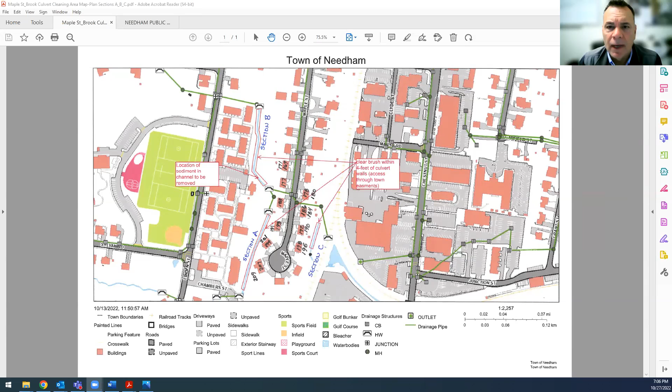Do we have any photos of this area? Yes, I submitted an email with all the photos of the areas, and all sections were listed there. So this is section A.

So this is section A, and you're going to be removing some of these vines coming into it, as well as some of the small saplings right on the edge. Correct, the stuff on the right-hand side, and on the left-hand side the small saplings. There are some invasives in there too, so we'll cut those. We're just cutting flush, not removing root systems or doing any of that at this point. We're just clearing it out to make sure these brooks and channels stay open for flow.

Any more photos? Oh yeah, we got plenty. You can see how this looks in this photo down below, it's just debris that's built up there. We're going to clean that out, make sure it's all gone. This big pile of stuff at the front, is that literally inside the channel? Correct. Okay, we'll get rid of that. Is this still section A? Correct.

Have we moved to section B? I think we have. It's so small I just can't see it. They look kind of similar, but there's still vegetation on the edges that will also come out, nothing larger than 3 inches? Probably 4 inches at the largest. And within 4 feet of the edge of the wall? Correct. So this is part of our general maintenance. Is this still section B? Yes, this is the area behind Maple Street that abuts the Needham Housing Authority property.

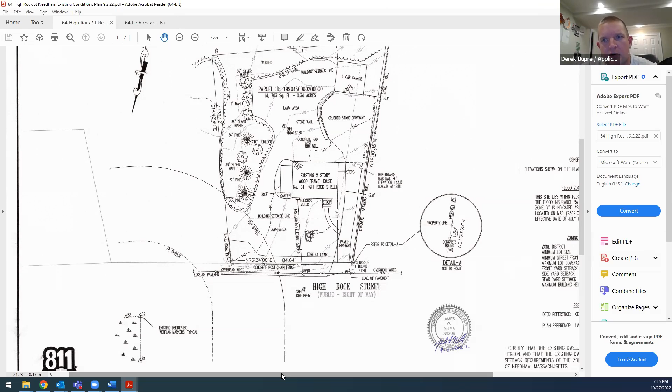Because, so you're actually going to do work there? You need to change that and grade it or something? Basically, the grades are staying the same on the property. The neighbor's a little bit lower, so we can't really be building up any, as it is. So we're just basically, it has a minor sloping grade from right to left on the property. So we're just gonna be, after the construction, reloaming it, seeding it, and basically what you see is what you get. This is the existing, right?

That's the existing conditions, correct? Okay, so here's proposed. It's basically the same, so in reality, if you didn't change that, are you just gonna reseed it or something? Because if you didn't change it at all, you didn't have to come to us. Yeah, we kind of went back and forth. There's gonna be some, obviously, on a construction site, minor regrading, loaming, things like that, but nothing substantial.

Okay, so have you put up erosion controls along this 100-foot buffer line? Yeah, we did them the other day. Because you could build the house and do all the grading and then come back to us next week. But if your erosion controls are along that line, at some point, when will you move them? To do the grading within it, at the very end, after the house is built. Yeah, then you gotta do the site, sometime. Okay.

Not anytime soon, that's for sure. We just got to get moving for the winter and stuff like that, and then figure out the grading come springtime.

It might be next spring when you regrade the lawn and reseed it, whatever. So be prepared to explain that, but any work outside of that 100-foot buffer line and outside of our jurisdiction, you are free to do, and then we'll talk about it in an official meeting in 2 weeks.

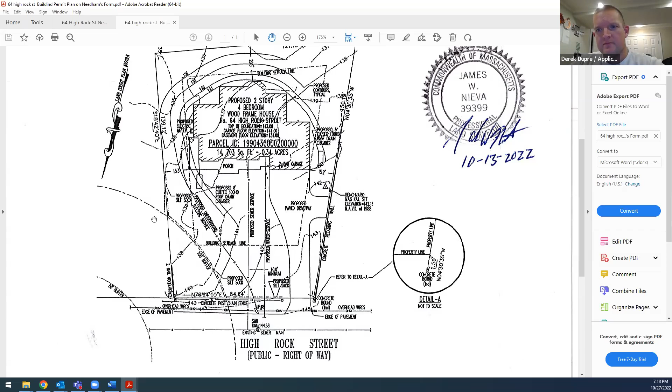Clay, you could take that down. I'm still kind of confused that we were supposed to open it, but anyway. Can I have a motion to continue the hearing for 64 High Rock Street for a request for determination of applicability.

To November 17th? Moved, thank you Sue. Can I have a second? A second, thank you Dave. All in favor? Allison, aye. Peter, aye. Dave, aye. Sue, aye. Great, thank you very much.

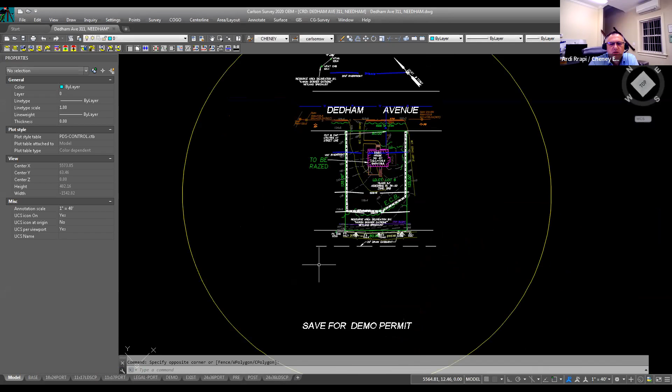Okay, unfortunately I have kind of forgotten what this one's about. So if I can share the screen with you guys, so everyone is on the same page. What's happening is that we have an existing house. Let me see if I can show you a better picture. So here is the existing house, that's what exists on the ground right now on Dedham Avenue, number 311. We have an existing driveway that wraps around the back of the house.

There is a slope on the property, so it was envisioned when they built this house for access on the back of the property. And what we are proposing is we're going to demolish this house with the porch and the water and sewer lines that it has, and we're proposing a new house. This will be razed, and the new house will be, we have shown the two of them overlaid with each other so you can see both of them.

So the green line would show the proposed house. What we have done in order to minimize the impact on the wetlands is that the entrance for the garage will be in the front of the house, so there will be no asphalt in the back of the property. However, the size of the building is, I would say, double the size of what you have for the existing house.

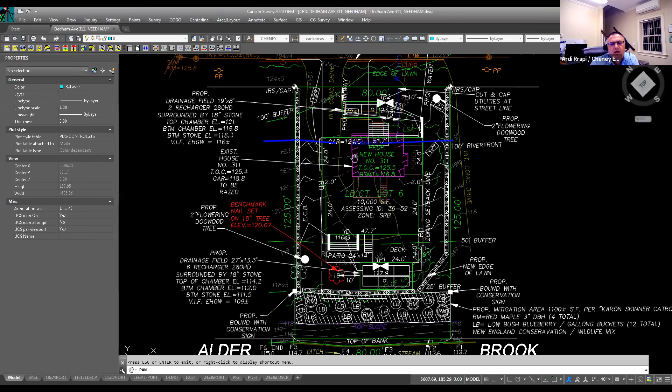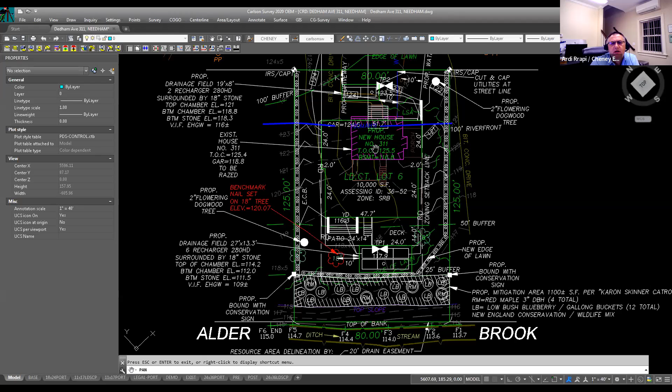What we have proposed in order to mitigate for the enlarged footprint of the building is to infiltrate, including the 100-year storm event, for the entire roof area of the house. The existing house doesn't have any infiltration that we could see. So what we are proposing is that this would be the new footprint of the house.

There is only one tree that we are proposing to remove, which is an 18-inch tree. It looks like the roots might be damaged. The owner has some pictures if the commission would like to see them.

So in any event, this would be the edge of the bank, and we've got the top of slope that exists on the ground, and part of the lawn comes inside the 25-foot buffer. As part of this project, we're proposing to use the 25-foot buffer as the limit of work, and mitigate by proposing several shrubs and 4 trees to be planted within this 25-foot buffer to enhance the protection to the river.

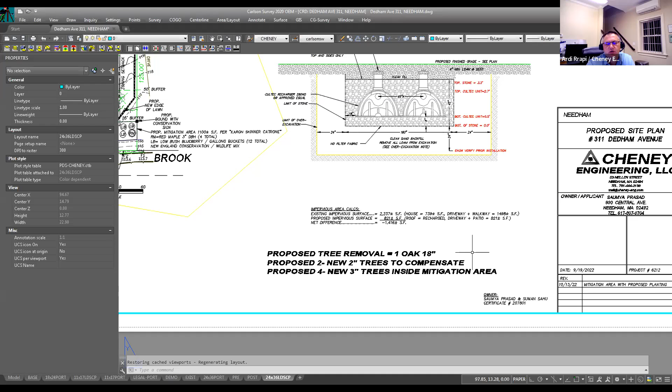For the impervious area calculations, we have shown here that we are recharging the roof for the entire house. So the impervious surface on the property would end up being almost negative 1,416 square feet.

It's only negative because we are recharging the entire roof, so we provided a drainage report showing that on every storm event we're going to be reducing runoff, including the 100-year storm event, into the ground. So 7 inches of water, you know what I mean.

So if you look at the comparison that we did before construction and after construction, on every storm event we have reduced the amount of runoff that goes off the site toward the brook. However, for clarity purposes, because we had a comment from DEP regarding compliance with the regulations, they requested that we provide the information for the impervious surface.

So the existing impervious surface within the 100-foot buffer is 1,520 square feet. Inside the 100-foot buffer, the impervious surface will be increased, just as impervious surface without taking any credit for the recharge area, by 1,000 square feet. So the proposed impervious surface would be 2,598 square feet.

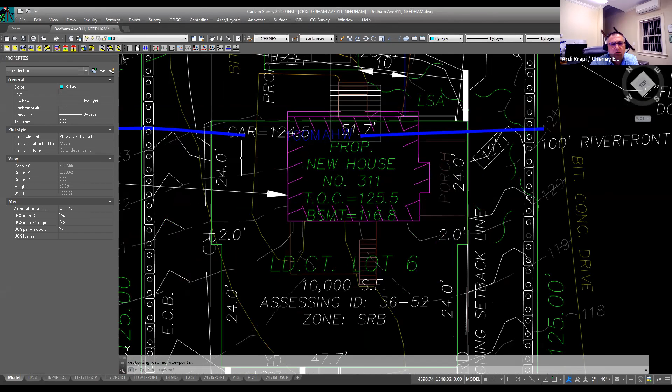We have shown here the setbacks for the building setback requirements. As you can see, we cannot move the building any closer toward the front because the requirement is that when you have a front-loading garage in Needham, you have to stay another 5 feet further away from the property line. So it ends up being a 25-foot setback. We have brought the house as close to the front setback as possible.

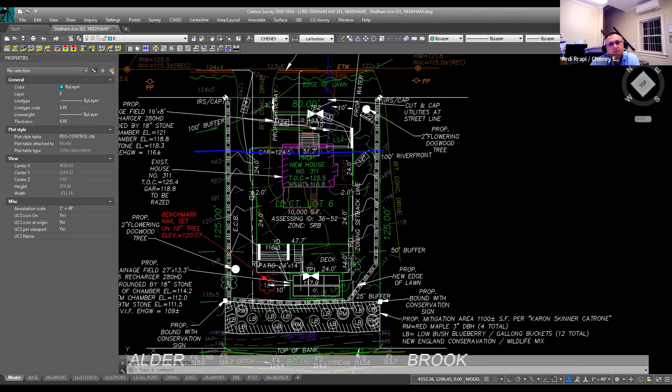And when all is said, doing this mitigation and to step beyond, since the conservation typically requires that we put monumentation to let future owners know that this is a no-touch zone, we propose two bounds with a sign on each on the 25-foot buffer. We're trying to be as proactive as possible, and we've already staked the property line on the ground. The owner has been trying to start this project sooner rather than later, so if there's anything we can do to facilitate the approval, we'd be happy to do it.

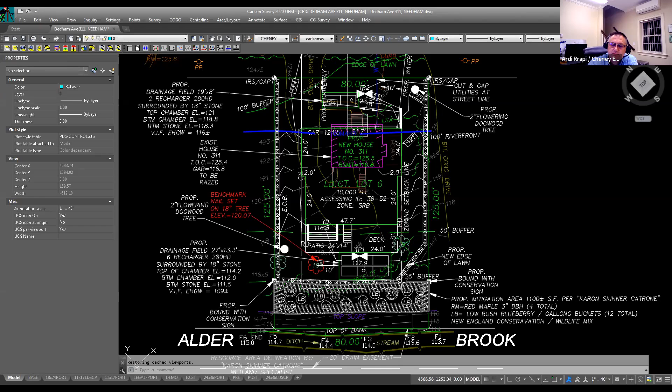Okay. You're finished with your presentation? That's correct, thank you. I'll go through the commission to see if anybody has any comments. Sue, you have anything?

The infiltration system, how far away is that from the 25-foot? One second. We would be another foot away, 26 feet away from the wetlands. Instead of 25, it's going to be 26.

We moved it a little bit to allow like a foot for the erosion control barrier to be in the 25-foot buffer, and after the erosion control barrier is where you'd put the septic system, the drainage field. We provided the commission with a report from George who checked the soils and didn't see any problems on the site. He didn't go too deep, but he felt that wouldn't be a problem, and there's a report attached to the notice of intent.

And a second question would be, was there lawn there originally within the 25-foot? That's correct, yeah, what we've shown is that the lawn went inside the 25-foot buffer. Part of this application would be that we'll take that off and restore the area, revegetating the 25-foot with native plants and a conservation mix. So the 25-foot will be enhanced.

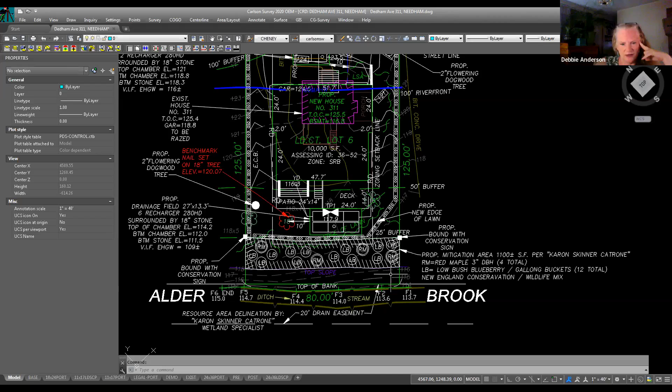As you can see, Karon went on the site and picked up 4 locations for the new plantings. As far as the low bush blueberries, we're planning on putting them around the existing trees. All right, because there's a pretty good canopy back there right now. We thought it wouldn't hurt adding more, but. No, thank you, I just needed that clarification. Sorry to interrupt.

Sue, anything more from you? Yeah, I'm good, I'm good. Thank you. Allison? Yeah, I have three.

To follow up on Sue's question, I think it would be really helpful if we had the existing trees located between the 25 and the wetland, to see if the way you've located the new plantings will really work. That's one thing. The second thing is, I was trying to figure out what you did, if anything, with the 17-foot and 18-foot contour in the back of the yard from the house back. I can see you've modified it to make little swales go down the hill, right off the house.

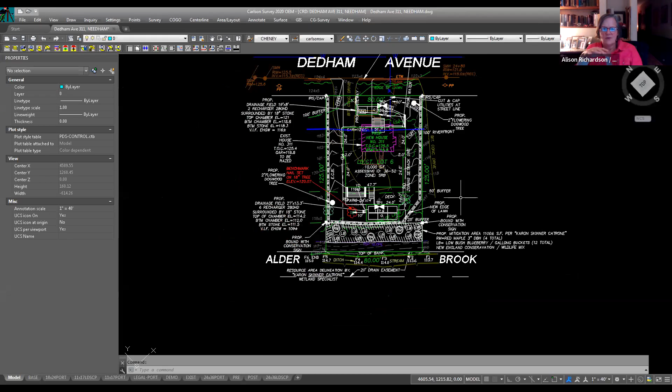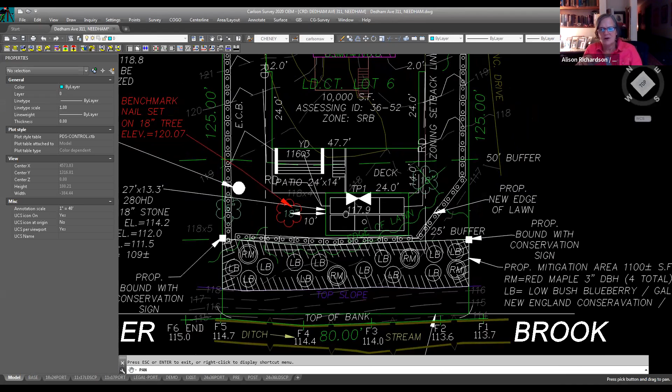But once you're past the house, you just have the existing contours. I'm wondering, are you really going to install the patio? You don't show any new contours from the house down, you just show the existing 18 and the existing 17. Are you really going to have the patio, what are the elevations of that? Are you filling? And the infiltration basin that's right on the edge of the 25, is that really going to be on a slope? I think if you plan on doing any grading from that 25 to the house, I want to see what it is.

Yeah, so maybe that didn't make enough justice, let me show you. But you don't show any new grades on that plan that you just had up from the house down. So if you can hear me, in this scenario, I'm showing the existing condition. I don't know what's going on.

I don't know, can you hear me now?

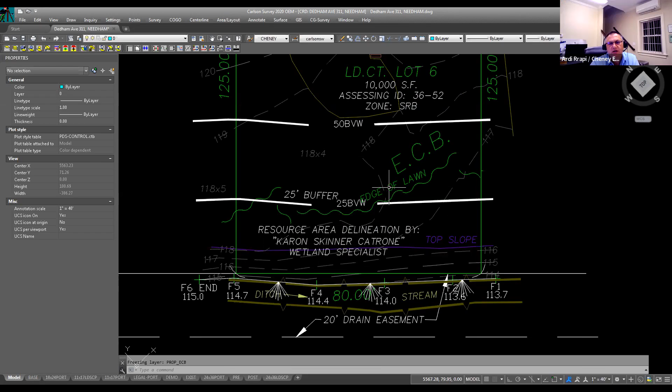Yeah, that's better. So what's happening is I'm showing you the existing conditions as a starting point. We have elevation 118 all around here, and then it goes to elevation 117, then 118, 117. Those aren't being shown as slope changed at all in the plan.

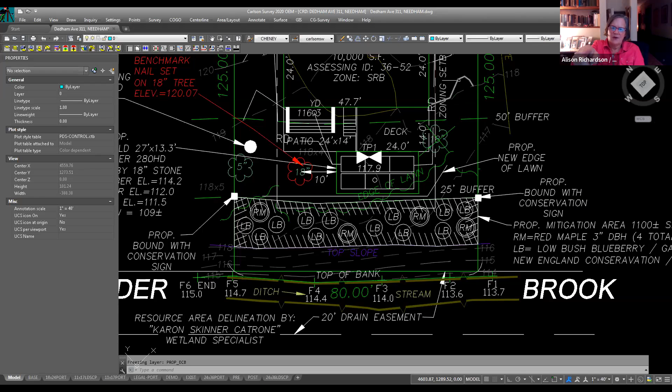What we are proposing is we are not changing the grade over there. So on the outside, we're going to be at elevation 118. But you see the existing 118 there - you're changing it into the bottom? Yes, if you look at 118, I see that, but then what happens to the corner of the building?

Yes, but then what happens to the 118 that's existing? Are you filling in there, or cutting? We're keeping the 118 and a half. The 118 will go to the back of the building. We're not filling anything, we leave this area as it is right now.

You see the 118, you see the deck where it says deck? Right to the left of that. Are you doing anything with what you just highlighted in the back of the yard? No, we're trying to leave the soil as is. All right, you're not regrading for the patio? The patio is land wherever it is, and you're keeping it at 118.

That's correct. So the patio in here, if you look, this is 118 at the corner of the wall. I know what I'm looking at. So we are not planning to change the grade on the backyard.

That's correct. All right, so the other question I had was... oh, I've forgotten. Oh yes, you might have already talked about this - is the patio permeable pavers, or gravel? What is it?

Because half of the patio is already going to be with steps coming out of the house, almost more than half of the patio is going to be with steps coming out of the house. They are not going to be pervious, so we have considered the patio as impervious. If the commission would prefer that the outside here be pervious, we can certainly accommodate that. That's not a problem, but on our calculations we have figured it out as being impervious.

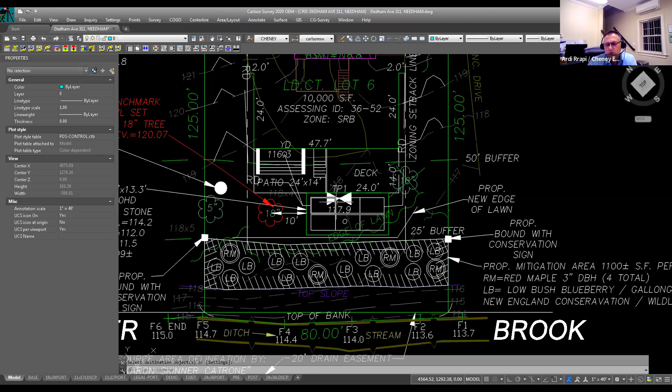It's up to you. Okay, we can think about that. Allison, any further comments from you?

No, but I think you could condition it so that the mitigation planting locations would be dependent on the existing tree canopy, so they're located to have the maximum root system and light, and the least impact on the existing tree root system. If you're going to approve it tonight, you need language that allows you to move those around so they'll live, and so you're not going to kill the trees by digging everywhere.

Dave, any questions or comments? No, looks good. Thank you.

Peter? Yeah, I had the same question as Deb did, and I guess it remains to be seen. I do like the idea of helping the understory, since that's been lawn for a long time. So the blueberry bushes would work, but I agree that it's very leafy, that backyard.

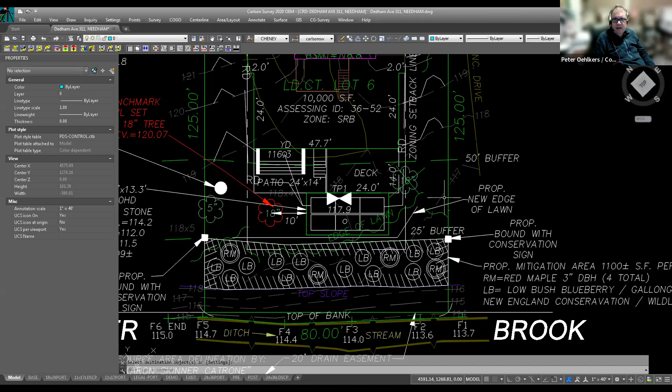So I did send Clay some pictures if you want to look at pictures. Oh yeah, that would be great. That's the back of the house.

So that is looking... oh, is this along the 25 foot buffer? Yeah, 25. Okay, the area to the left there - there should be more, maybe head on. That's the stream channel.

Oh wait, go back to the stream channel for a second. Thank you, okay, all right, great. And the next one, so that one's looking head on at that area in front of the stream channel.

So there are existing trees, yeah, definitely existing trees in there. And what's the, oh, the fence is the side property line? Yeah, the side property, yep. So the trees are going in the already treed area, they're not going in the lawn there, right? That's correct.

The house - which is the tree that's coming down, do we know? That's up by the house more? It's on the left-hand side of this tree in here, this tree that we are keeping - this tree on the left-hand side. You will see, if you go to the picture before that, it was showing the fence.

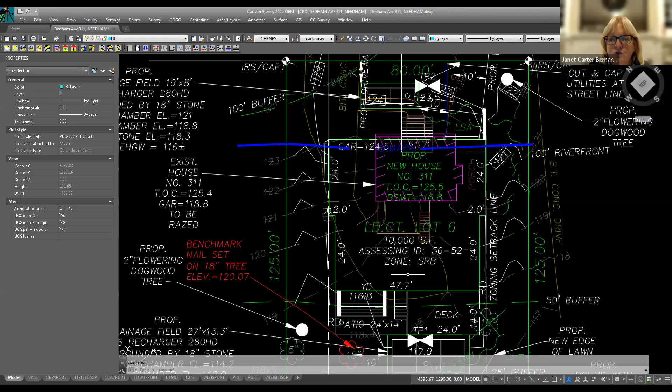There's some flags, F3 shows it at 114. So how high do you think the wall is? Around 4 feet there. So that would bring your stream to 110. Yes, so you're estimating the groundwater is at 109, which is lower than the bottom of the stream. So that could be a problem.

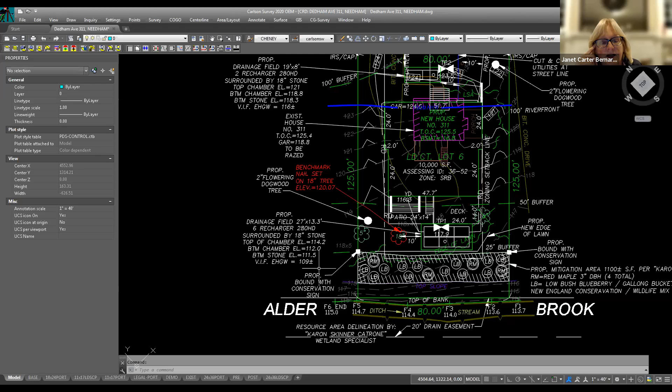We're going to need you to provide a certified soil evaluator or professional engineer to certify that test pit before the chamber goes in, and make sure you have plenty of separation to groundwater. Of course, that was our intent, and we have room on the front of the building if we need to adjust the design. You see how we have 2 chambers over there and we put the bulk on the back? If needed, we can change the size of the Cultec chambers that we're going to use.

So we don't believe that would be an issue, but nevertheless we put a verify-in-field note to make sure we do get that elevation. Typically what we've done before is when they have the machines on site, we'll have them verify, and we'll give you a written statement from George saying he witnessed it and the groundwater is below elevation 109.

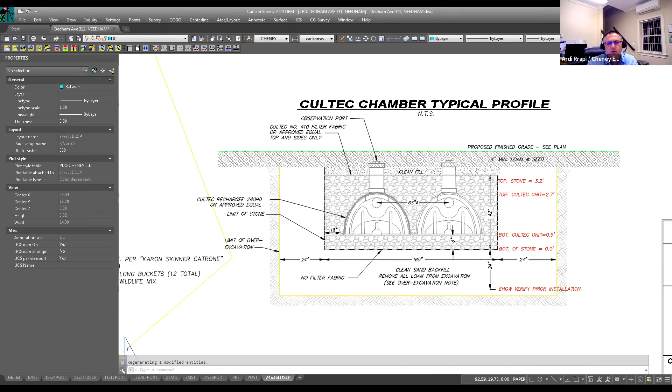The detail you have for your Cultec chamber, the typical profile detail, is wrong. It's the wrong detail. Okay, sorry about that. Your calculations were correct, but you're showing the large chambers with the 42-inch depth, when you actually used the 280. We used that detail, but I called out the 280. Right, so you need to change the detail on the plan. Okay, I'll make sure to match it.

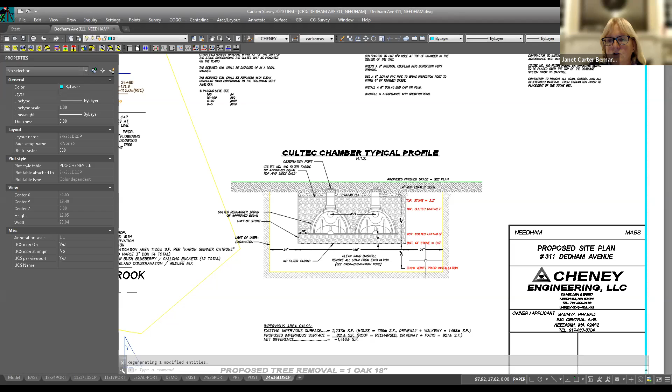So I did look at your stormwater calculations, and besides the fact that you didn't actually have... I've kind of lost you guys, I don't know what I just did. Okay, there you are.

You didn't really know where groundwater is. So you'll have to remove all of the soil so that clay is gone from below those chambers. You have to confirm that it's good soil underneath them and that you have some separation to groundwater. What George reported was that as soon as you take off the A layer, the B layer, below the B layer, that's when the first 3 feet were bad.

So what's going to happen is we're going to take the top part out, and the installation will be below the clay layers. Exactly, you're not going to stick the clay back in. And on the detail, you can see we allowed even more room, another 2 feet on each side of the field, to be opened up and make sure we got good soils.

So we're going to need a planting plan that shows the existing trees. And we're going to need the detail corrected on the Cultec chamber. We want to show the porous patio and a detail for the permeable patio. And a test pit done, certified by a soil evaluator or a professional engineer saying that you have adequate separation. I guess I'd like the commission's opinion about having him provide this information.

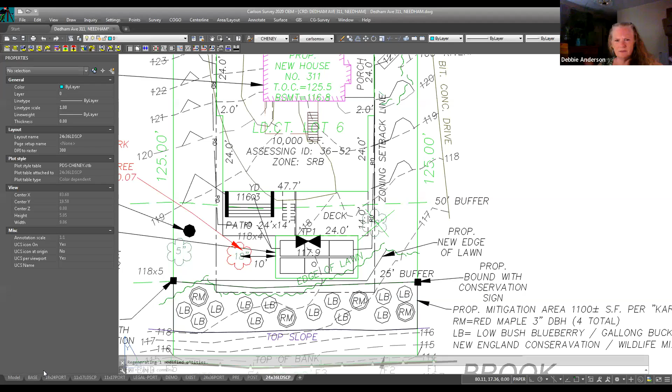Still want that third bound? Well, they're just on the property lines, so there's nothing in the middle, basically a straight run. Whatever, up to you guys. So we've got one bound along, another bound along the property line, and we're trying to keep people from going in there and mowing and such. So that's just why I think you should have another one that's visible instead of just on the property lines.

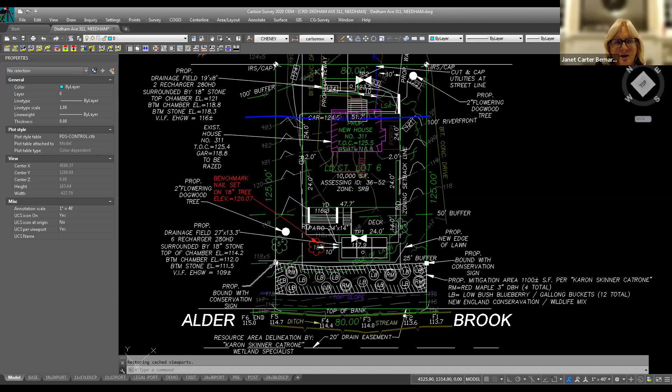So it's within that area that they're mitigating, and it can be a stake, be like a monument. It can be a rock, it can be a birdhouse, it can be. Just because the lawn has already gone into the 25-foot once, so we just want to make clear where it is.

So can we show like a boulder over there? Would that work so that we can make it kind of fit with everything else, or are you looking for an actual bound? A boulder, anybody object to a boulder? I have no problem with a boulder, as long as it has a sign on it, it's fine. We have some markers that you can affix to it, it's a little circle, you can affix it to the boulder and to the property lines. Okay, anything else on that, or are we ready to vote?

They did request a waiver for work within the 25 foot, and a waiver of the waiver fee. So as far as, I forgot to come back to the riverfront area.

This is the riverfront area DEP was concerned about. The whole project was called a redevelopment, but only the existing impervious area is redevelopment. As far as work within the riverfront, that's allowable because the existing driveway already extended as far as the proposed house will go. The added impervious amount isn't over the threshold, so they're meeting the riverfront area performance standards. I needed them to add mitigations to improve the existing conditions, which is why that area is now being mitigated to improve the riverfront area.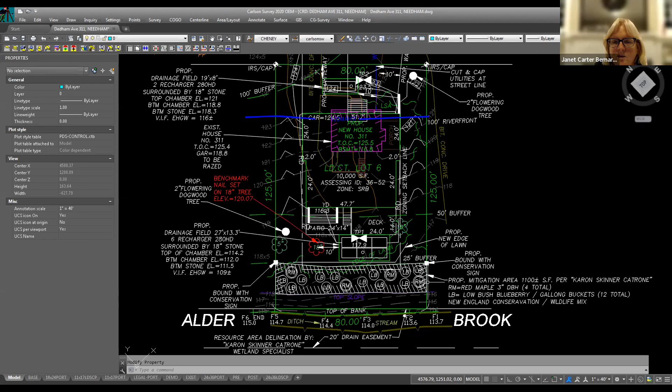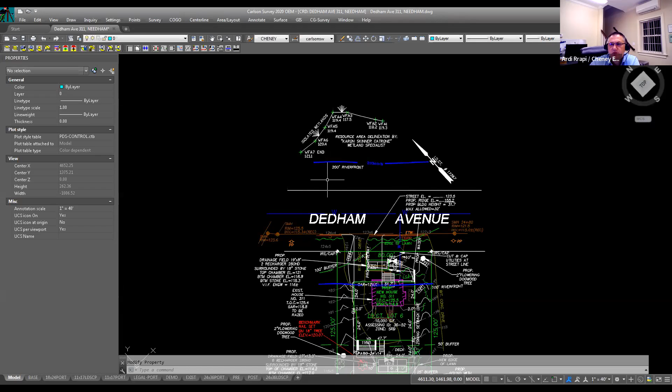I forgot to mention there are wetlands across the street, across Dedham Avenue. This would be the 100-foot buffer from that isolated wetland. It doesn't impact what we're doing, but for clarity it's shown on the plans since the road is on the other side of the project.

There's no catch basin in the street right next to the driveway, is there? No, we located the sewer manholes here, but there's no catch basin or anything that could affect the ground.

If we're ready to close this, we still need to address the waiver. We don't have to do that until we review it, just keeping that in mind—we'll have to come back to the waiver request. It's hard with this type of project.

So if we're ready to close the hearing, I'll take a motion. I move we close the hearing on 311 Dedham Ave, file number 234892. Can I have a second? Second, thank you Dave. All in favor: Peter, aye. Allison, aye. Dave, aye. Sue, aye. Janet, aye.

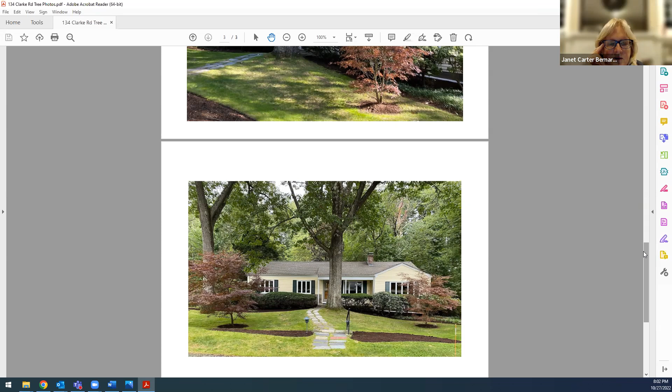It is kind of always heartbreaking for us to see beautiful trees being asked to be removed. I can appreciate the one that's in front of the front door, as it seems very close to the house. The one to the side, I really don't see any reason to remove a perfectly healthy tree that's on the side of a house that's providing shade and canopy and so many wonderful opportunities for this home. They're going to be very hot if they remove those trees.

But the trees in the back, I understand, are within the 25-foot no disturb of the stream. Is that true? They're on the bank of the stream. So we cannot allow you to remove the trees that are in the back, because that's in our no disturb zone.

So you hear that. Do you have any thoughts, Allison? Yeah, I do. I mean, without going and looking at them, I know a lot about red oaks, and I don't know if your arborist did a density test, where they can test to see if it's sound inside. Those are old trees.

Now red oaks live a long time, but they do start to decline with great age, and they must be at least 80 years old, maybe older, 100, I don't know. Certainly the one right in the middle of the house looks really close, looks gigantic. And the other one looks like there's a big limb coming over the house, the one on the side.

And the problem I see with pruning giant limbs off older trees is that, yeah, you do reduce the canopy and you can make it temporarily more safe. But when you cut a great big limb like that, no matter how well you do it, it's going to take a long time for it to heal, for it to callus over. It's a source, it's just like a human cutting your arm off. It's a source of potential infection. And so you are kind of setting the tree back.

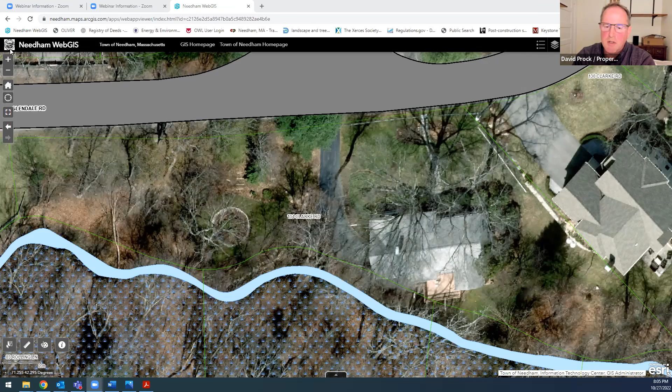One of the things we're really looking for is, can we or can't we take them down? And that's sort of been the question. It kind of leads to going back and forth a little bit with our lawyers and the buyer's lawyers. We're just trying to figure out, we'd like to move on and the new buyers would like to move in, and we're just looking for clear marching orders. It sounds like we can't remove the trees that are down by the stream.

I understand that. But in talking with Deb, we're just trying to understand what we can and can't do, I guess. So if you were to remove the 2 trees in the front, each tree, we would require 4 replacement trees because they are large, healthy trees. If they were hazard trees or other things, we maybe don't ask for as much mitigation as a very healthy tree.

I don't think we can say you can't take them down. We just feel badly about asking you to take them down because it's a struggle for us. Within the 25-foot no-disturb zone, you can't take them down, but the 2 front trees we could.

When it comes to the requirement of 4 trees per tree, we are in the process of changing hands with the property. What is the liability if we remove the trees and then, let's say, the new owners don't replace them? Is there liability on our side?

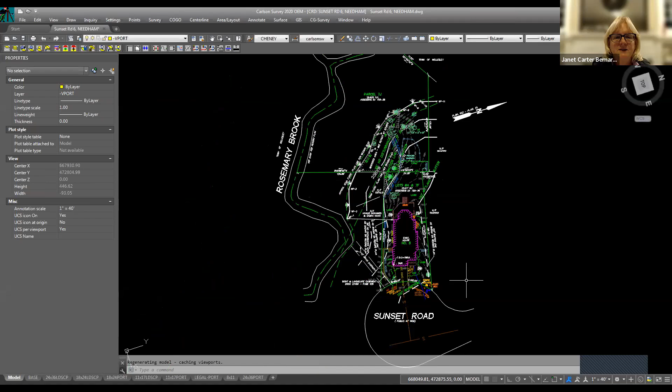So what's happening is that this is an old project, and the way the order of conditions was issued was that Conservation Commission would not consider issuing a certificate of compliance until we provided a plan showing the actual document that needed to be recorded at the Registry of Deeds for the restriction area. So it's an old project from, I guess, 10 or 12 years ago, or older.

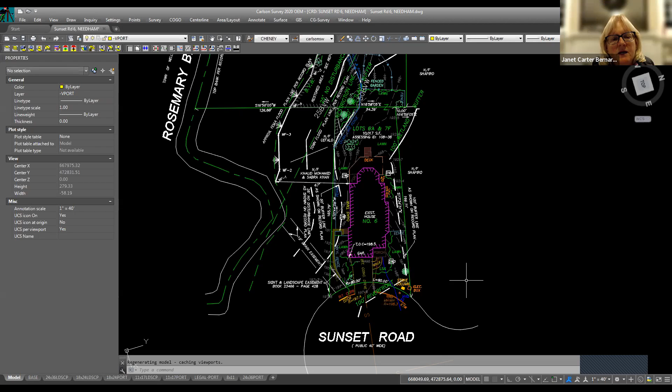I don't mean to interrupt, but Sunset Road, that's where the Sunita Williams School is, right at the end of this? Yeah, it's a little bit further down. This is the cul-de-sac, next to it, at the end of the cul-de-sac. You keep going. Okay, got it. Now I know where we are.

All right, so what happened with the plans? Let me start with the plan first. I have an overlay. This is the original plan showing what was proposed at the time. 2009 is when the work was done, and now we are in 2022.

The owner of the property sold the house. The new people have moved in, but we've got to close the order of conditions. Let me freeze this. So the new house has been built with a deck, the driveway in the front of the house, and the fence that was required to be installed. There has been going back and forth between me and Clayton and Deb as far as what transpired.

I have a letter that we provided for a request for a certificate of compliance. So the items that we see are different between what was proposed and what actually got done. Item number 1 would be a gas tank — it's a propane tank that sticks above the ground, located on the left-hand side. This is one of the items that wasn't approved, but is already installed.

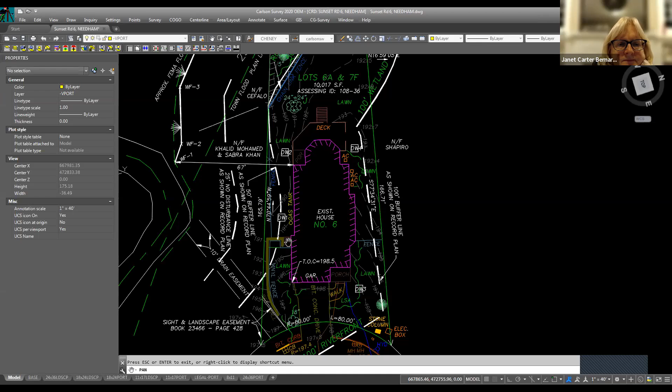When we were on the ground, we located the trees so we know which ones are on the ground and which one is missing. What we found is a couple of typos. This tree, for example, tree B, we measured at 15 inches, but on the original plans in 2009 it was shown as 18 inches. The only reasonable explanation we could come up with is that the party chief was a short guy, and the chest height must have been much lower than what we measured. So we don't believe the tree shrunk, but it is what it is.

The same thing for this one, we measured it at 7 inches. On the list that they had done, they were showing a 10-inch cluster, but showing it as one tree. For clarity, we're saying it's just a 7-inch pine, but it is what it is.

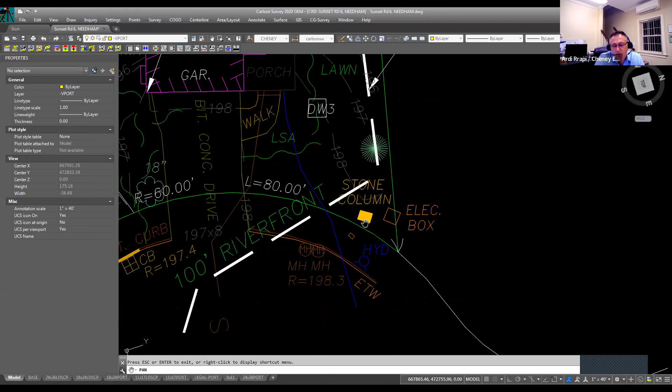There is a stone column on the front here, near the electric box - you see there's like a stone column. I don't know why they put it there. It's almost 6, maybe 4 or 5 feet tall, but it's there. It's within the 100-foot buffer.

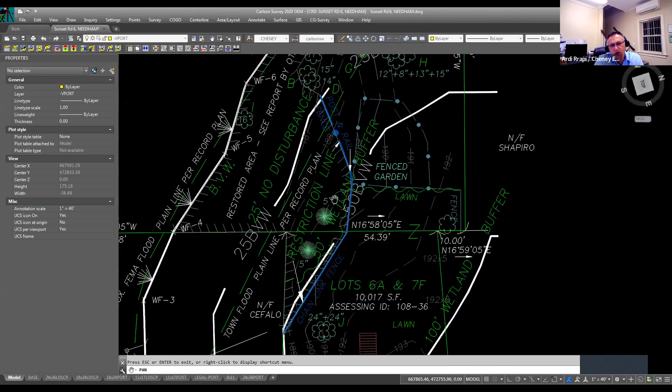One of the things required by the commission was that for the restriction line, a fence was going to be installed along this line here. So at the time, this section of post and rail - just vertical posts with ropes in between - wasn't there before, but they put it in. We didn't go all the way to the tree because we didn't want to damage it. But here is the location where we staked it on the ground where the 25-foot buffer was, and they moved the chain link fence so that everything falls into place.

What we did is hatch the area to show the line of where the replication was going to happen - I'll make it red so you guys can see it. So this would be the area of the replication in question. The fence is there, and the post and rail fence over there continues also.

Why would the area have this sharp 90-degree bend in it?

This is how much they own. This is owned by someone else. Oh okay, that's why, that's a different property. It's a different property owner.

You see how they were showing it on the approved plans? Yeah, okay.

Let me show you another plan. This is the plan that we provided to Conservation Commission, because part of the deal is that the Conservation Commission has to approve the restriction plan. We already provided that document to the commission for your approval.

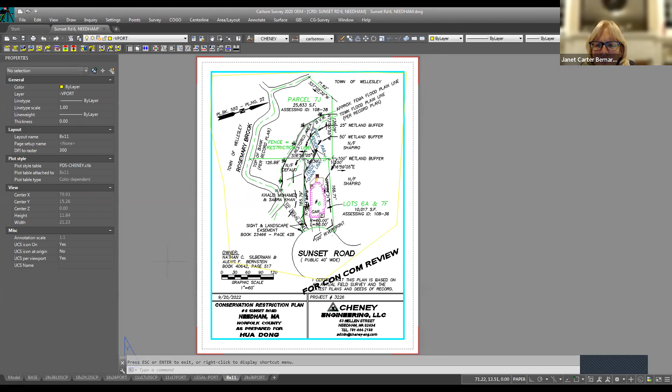So there is a restriction that was required to be put on the property. That hatched area that you just showed us, that little hatched area is supposed to have a conservation restriction on it?

Me and Clay agreed that it looks like that's what the intent was of the commission at the time, because this area was disturbed. So what they said was, you got to put a fence in here and you got to provide the plan to be recorded at the Registry of Deeds.

We are assuming that the intent at the time the commission had was that this area that they were replicating or restoring was to be restricted. It would have made sense that you restrict the whole area up to the 25-foot buffer, but it wasn't that clear. That's the purpose of this plan, so that if you guys feel we got to change something, maybe now is the time.

It just seems like when you have a conservation restriction, don't you kind of say north 35 degrees, and then take the left and so on. All this zigzaggy thing is kind of a mess.

My understanding was that the way the commission was envisioning this was to say that the chain link fence area with the post and rail area, this would be the limit of the restriction. So anything beyond, on the left-hand side of the chain link fence and the post and rail fence, is the restriction area. I showed the hatched area just for clarity.

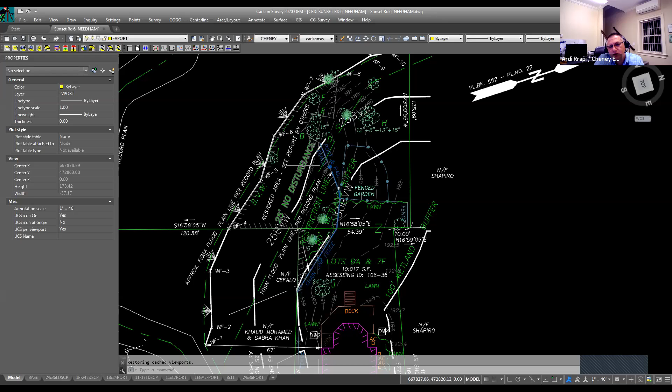If it was me, for clarity purposes, I would take off the restoration area and just show the fences in there so people would know in the future, 20 years from now, that the restriction goes from the fence all the way up to the wetlands. We showed it, and I can take it off, but this is the restored area - I showed it so you guys can see where the restored area is.

But one version would be if you remove that and you just make it clear, and you say here is the post and rail fence, and fence equals restriction area. Then someone would know that this area here is what's being restricted.

Rosemary Brook? Is that Rosemary Brook there? That's correct. So that piece is also restricted compared to just this little hatched area?

It just seems crazy, this little teeny hatched area. Well, the hatched area is the restored area, not the restricted area. Okay, so the hatched is the restored area, not the restricted area.

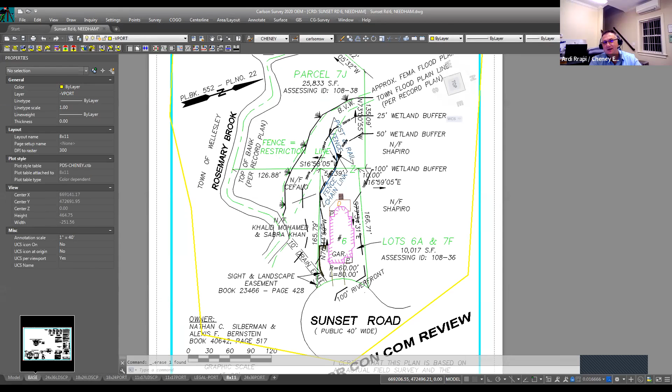So what about to the right of that fence? The order wasn't clear at the time, so if you would like to show that line, we'll be happy to do it. But if you look in here, this is where the fence ended because this is where the trees were. I'll show you the approved plan.

So here is the approved plan, guys. You see the yellow line, that would be the line where they wanted the conservation in 2009, wanted that fence to be put in.

So what was it correlated to, because of the floodplain? Was it to somehow correlate with the floodplain? No, it correlates with the limit of the bordering vegetated wetland.

So the planting area, you can see where the edge of the wetland is. So where the fence is, the restored area was to go to the wetland, correct, wetland flag 7.

Okay, so if we were to, in our heads, extend the yellow fence to wetland flag 7, and say that - well, I guess it's more wetland flag 8.

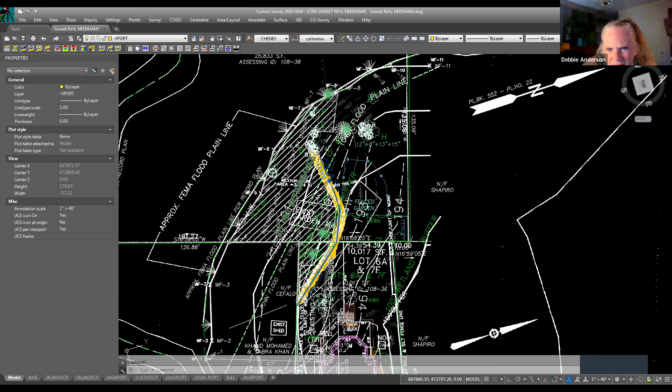The hatched area, yeah. So then it would go to a different angle. So is that what we wanted to do, like rotate it up to wetland flag 8?

I kind of wonder why the whole 25 foot should be included, but I'm trying to understand what was thought of so long ago.

So if you look in here, this would be the line that they were showing for the town floodplain line, the green line with the big dashes. So my guess would be that you cannot do anything within that area anyway.

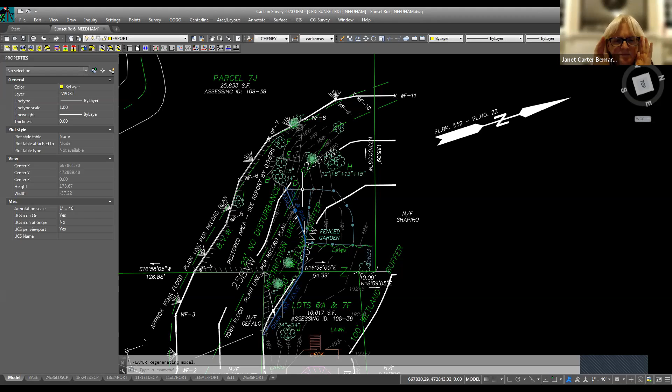Right, so maybe what you might want to say in the language on the documents - another way to look at this would be to say, okay, the area on the southerly side of the fence, and the area inside the 25-foot buffer up to the brook, will be all conservation area or restricted area.

Well, that would work for me to say the 25-foot buffer. But is there anything marking that 25-foot buffer besides the fence that ends in the middle of it? Nothing.

It was required that the fence be put in. It wasn't required anything more. So you're not gonna include the whole restoration area?

Well, but I don't know how to show that to anybody. How about if we do this - rather than have a monument over there, we put a distance in here saying 73 feet away.

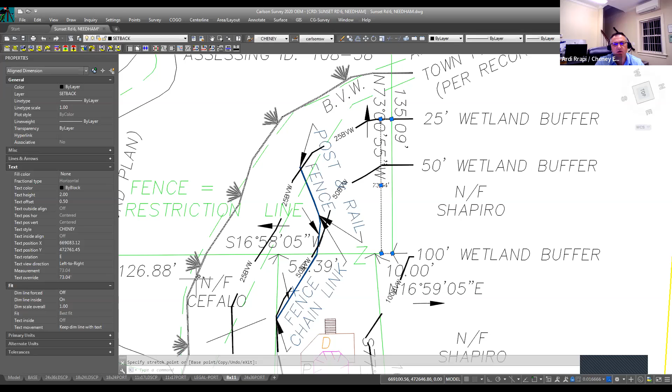Do you see what I'm saying? So from the corner, from the lot corner. Can you zoom out a little? Or maybe I've zoomed in a lot. I don't know - oh, I've zoomed in. Wait, hold on, sorry.

You see, so from the 25-foot buffer, there's - let me make this in red. So from the property corner to where the 25-foot buffer is, it's 73 feet away.

Okay, so I can show a distance on the plan, say 73 feet to there. Now you can say that the restricted area, which is shown on the plan, shown Cheney Engineering, goes along the existing fence, chain link fence, and the post and rail fence up to the 73-foot mark from the front of the lot. You know what I mean?

That way we don't have to go back and put something else on the ground when we got new people owning the property. Yep.

Now, I followed that. Would everybody else follow that? Yeah, why don't you just say it follows the 50-foot line?

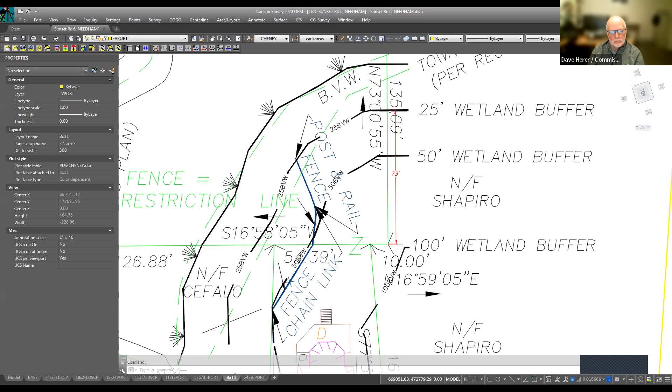I don't want to say follows the 50-foot line, because if you look in here, inside the 50-foot buffer, they have a garden. So part of the approval was that they were going to remove the garden that was inside the 50-foot buffer, but they ended up putting it back.

So if it is within the 50-foot buffer - yeah, so now if you say within the 50-foot buffer, now they're gonna have to take off the fence, because the garden cannot be there - you can't have a garden inside the restricted area. Either you're restricting it or you're not restricting it.

I don't know, am I making sense? Yeah, I think you're making sense.

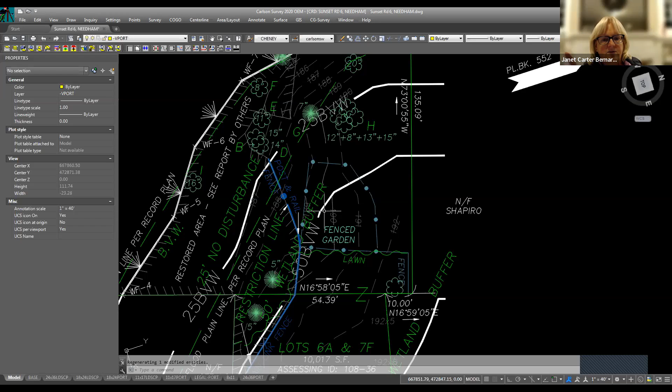Just to finish this thought on the conservation restriction, which I didn't really understand was part of the conversation - that's the reason for the discussion, because the way the order of conditions is written, you would not consider issuing a certificate of compliance without a restriction being recorded at the registry of deeds. So that's why you're here - we're going to create this restriction, which is going to show the fence and 73 feet from the property corner.

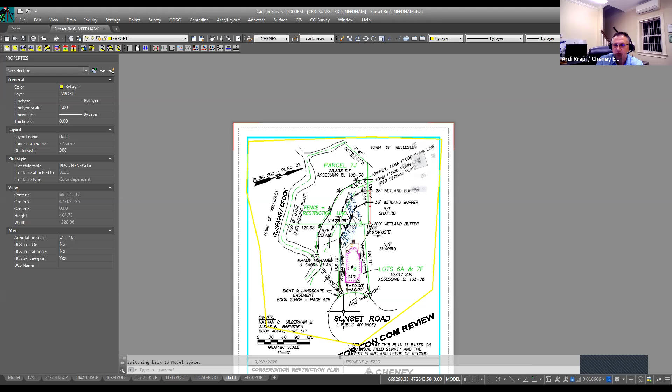This is a different plan. So the plan that I did with you guys was scale 1 to 20, because of the 24 by 36 paper. We did a separate plan on scale 1 inch equals 60 feet, and the reason we did that is because there's going to be an attachment to a document, but at the same time, we want it to be legible.

So one of the things that I would like from the commission tonight would be, are you comfortable not showing the restored area on this plan, just because it makes it more convoluted? Yeah, that the restored area one has nothing to do with the conservation restriction.

Now, when we say conservation restriction, do you want me to put some arrows to say, okay, to the fence and then up to the 25-foot buffer, so it's obvious? How would you like me to show this? You hatch it, just like the restored area was hatched. Why couldn't you just hatch this restricted area? Would you want me to go all the way to the river, or how would you like me to do it? Yes, the entire area, just the wetland line.

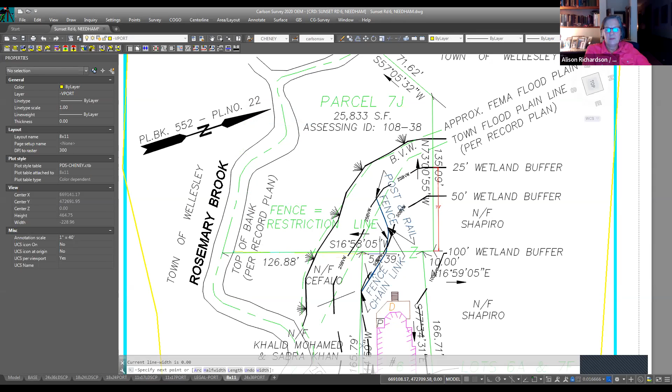What has just happened? We good again?

I think the area, the entire area that you are envisioning as this conservation restriction, to show on this figure - you will draw that line in and then have the whole area hatched in some way, shaded, whatever, however you want to see it, and all the way to the center line of the river, which is the edge of their property.

I'll make it red so we all can see it.

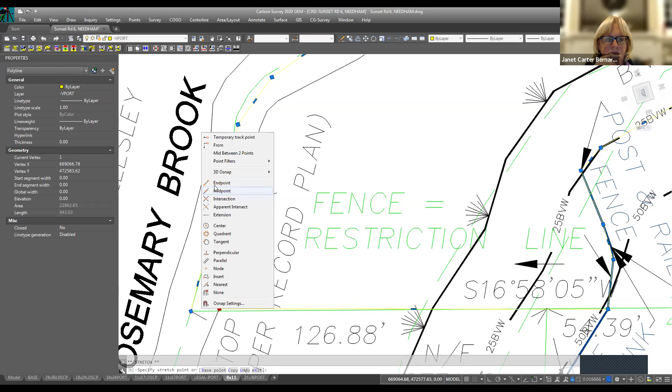So with something like this, I mean, obviously I'll make it more pretty, but just for right now - could you take that and just fill that in with a shade, like a light gray or something?

I mean, what happens when it goes to record it? Does it get copied a thousand times or something? Well, when you try to shade it, it's going to be difficult.

Okay, okay, or, fine, one way to do it would be - once you hatch this area, what if you do it? Hold on, let me make it. What about if we do that?

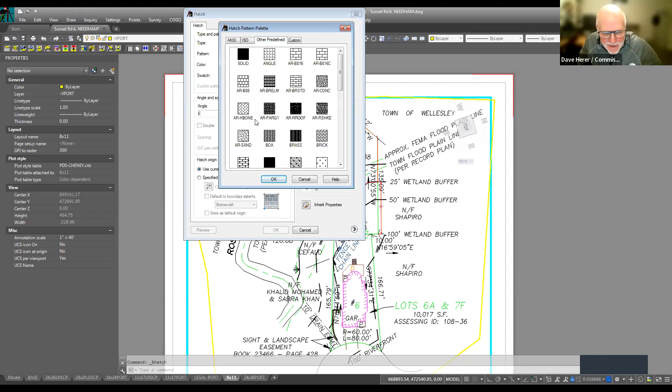Giving us some CAD lessons here. Yeah, really, yeah, that's good.

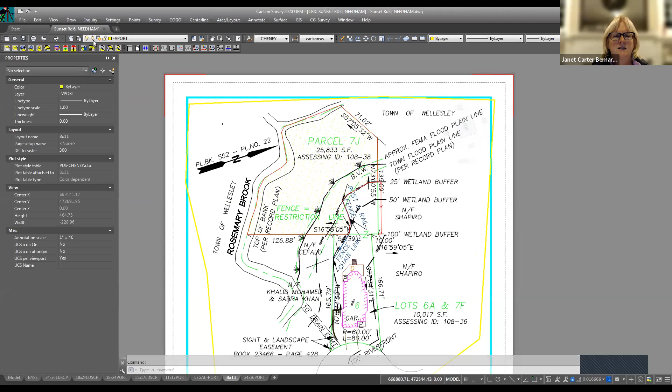No, you can't see those. I liked it with the two. You can see the two. I can't really see that little one. Maybe is it going to be too dark, or maybe we can say 3? Let's see, 3. Is it not going to stay yellow? It's going to be some other color, like black or something.

Would this do it? What do people think? That's very obvious to me what the area is that's being considered. And you'll have to take your text and bring it to the front or something. So now it's going to be hard to show the restriction.

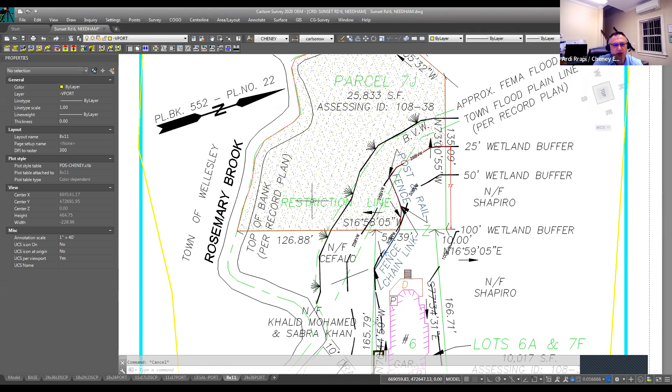I'm going to have to show some arrows for the restriction line, because it has to be obvious that people know what the restriction line is, like how I've shown arrows for other things. Yeah, you could clean that up. Yeah, but that's the idea, I guess.

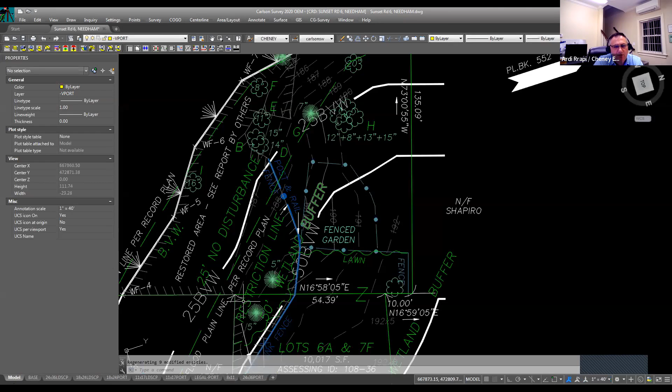A couple of minor things in my mind - on the approved plan, they were showing the flags from wetland flag 1 to wetland flag 11, the 25-foot buffer, the 50-foot buffer, then the 100-foot buffer - it all made sense.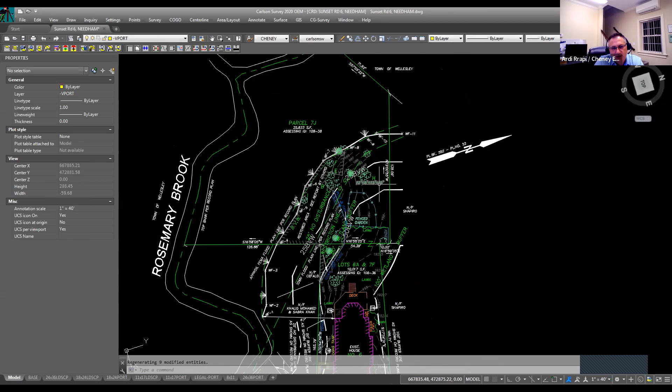On the plans they were showing, this line appears to have been the floodplain line going like this, and on the approved plan it was showing a 50-foot buffer somewhere in here, but there were no wetland flags. So the way I got around it was to say, okay, 50-foot buffer line as shown on the record plan - I showed this as dashed because I don't know exactly how they came up with this 50, but that's what was approved. At the same time, there was a straight line coming up in here showing a 100-foot buffer. I don't know exactly how the commission came up with that line, but it was approved, so I'm kind of leaving it alone.

On the final plan, everything should look obvious. So was it just the bank over there that they went off of? There weren't wetlands in that riverfront area - did they get that from the bank? This dashed line on other plans was showing as top of bank. So maybe when they were doing work on other projects in here, they knew there were flags in here, but it wasn't shown. There's no flag number in here.

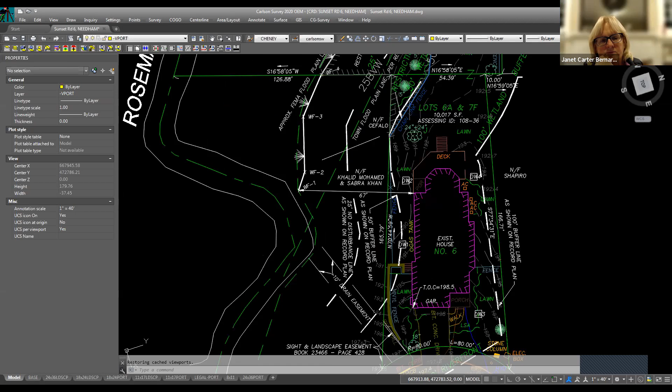I did meet with Clay and he said the best way to do it would be to show a distance from this flag to the house - we're showing 67 feet. And these lines show a 25-foot no-disturb and 50-foot no-disturb. Maybe they knew this was not just the floodplain but also the wetland line where they got it from. But maybe it's not wetland, maybe it's bank, maybe it's riverfront - this line they were showing was 100-foot riverfront.

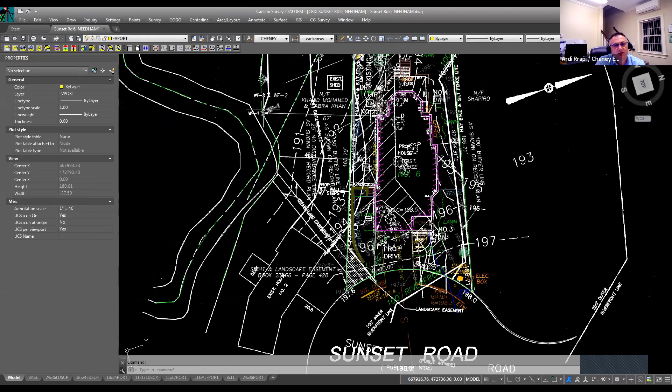I mean, how can you go on a straight line? Well, here is the plan - we tried to, we did an effort with Clay to try to understand it, but as you can see, they show this straight line going this way. So when they represented this line, they show a distance of 41 feet to the property line. I'm assuming they knew this was some kind of a wetland line.

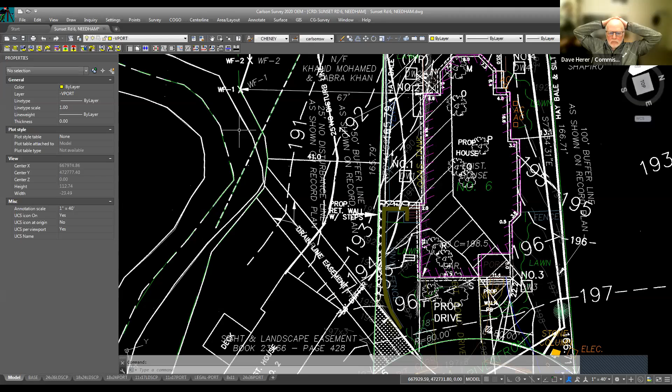Like the bank - well, the bank is shown a little bit further away. This would be the bank, but maybe this other line they had may have pulled up, or maybe it's something else, like annual high water. But you can't make it up - you don't know what it was. This is a straight line here, so you don't have anything that is straight. You're asking if it's okay for you to say it's off the record plan? I'm just pointing it out, I'm showing it as dashed.

One of the requirements for doing the plan to be recorded at the Registry of Deeds was that we were obligated to show the approved lines that the commission had in 2009. So yes, walks like a duck, squawks like a duck - as long as everyone is on the same page here, that's what I'm trying to say. I think you got the gist of it. I also think the conservation restriction is the most important part.

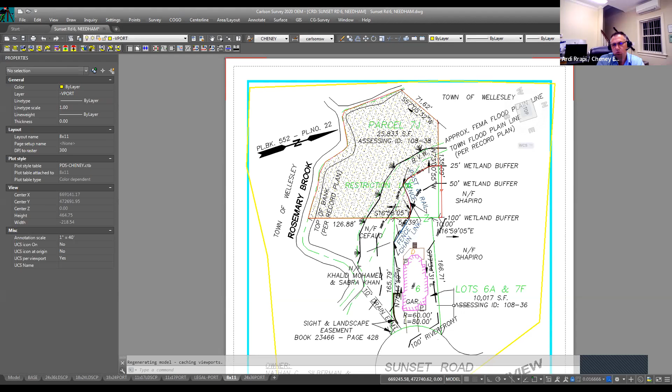That house and all that property is within the 200-foot riverfront of Rosemary Brook. So, are we done with this conversation on this plan? One thing I would like the commission to consider - because the owner we are working for has already sold it and moved to another state - is it possible that the commission would consider giving a partial approval?

Well, I think we've had a long conversation about this plan, and I understand, which is - I think we've got pretty far. We gave you a lot of good direction, but there's a problem with the plants, and we really care about the restoration area and the mitigation that was supposed to happen all this time, and they're really not there. So that's, I think, our concern. I think you got good direction, you've got to get this plan recorded, but Alison, you had something else to add?

The question was way back, like half an hour ago. Oh, you have a terrible connection for some reason. Dry wells - it was way back, half an hour ago.

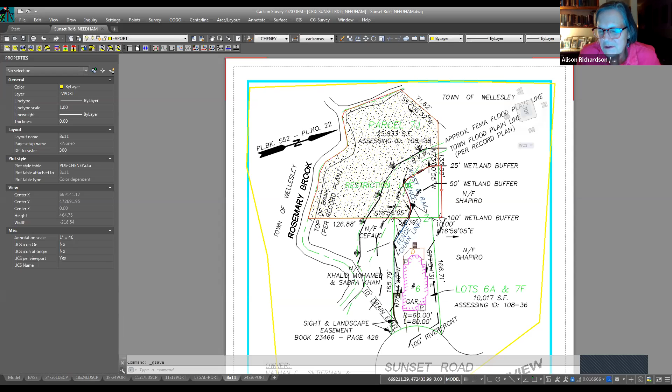And you were saying, well, we assume that they work, and we can't find them. But my question is, do the downspouts and the gutters work? Does the rain go away into the ground and not bubble up? That's how you can tell if it works or not.

I was wondering about that too. Does it overflow over the gutters and not work? Has anyone ever noticed? According to the owner, the gutters are working beautifully. He never had any problems since he moved into the house. The dry wells have been there 10 years and are working, going right into the ground, and disappearing. That's correct, they're working.

So I think it's fair to imagine that the dry wells are there and they're working, but the plants are still not there that are supposed to be there. Do we have the planting plan?

So Mary Trudeau is the original wetland specialist that worked on the site. She gave a report stating that, in her opinion, the area was back to normal conditions, was revegetated, nature had done its thing, for lack of better words. I heard that already, but Deb has been out there and is not in agreement with that. So I met with her, and we are not in agreement with that. Understood, so that becomes the topic to work with now.

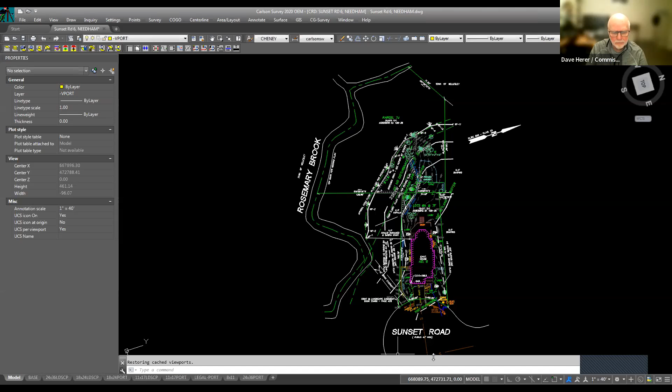The fence has been put in, the restriction is recorded at the registry of deeds, and the documents have been approved by the commission. So you can give a partial certificate, or you can give him full compliance.

Well, we're not going to give them a letter of full compliance. We're not going to give them full compliance. Okay, Ardi, I need you to stop talking for a few minutes, because you're making me tired. I've got a headache.

Commission, who has an opinion? Deb, do you want to share any of your information, or do you want the commission to go around? I can just give a brief overview if you'd like.

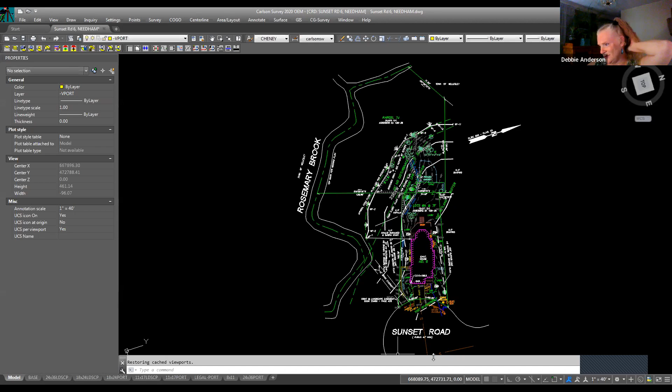That's fine. So the restoration area is about 3,000 square feet. There were supposed to be 3 white pines and then 84 shrubs planted in the area. This was supposed to happen 12 years ago. We didn't get any monitoring reports until now, when they wanted to close it out.

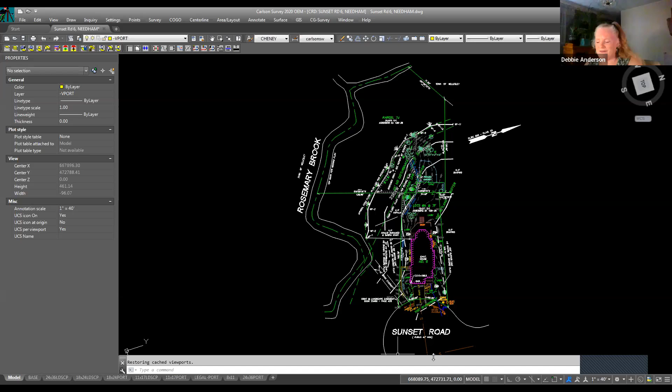So Clay, you have a couple of pictures, I think, that I sent you. I don't know how Mary could think that she met the 75%. In that area is where the 84 shrubs and 3 trees are supposed to be planted. I don't know if you can see it in this picture, maybe another one, Clay.

So you can kind of see a little flag on that little twig on the bottom. Yeah, right there. She's counting things like that towards the restoration. That was done nine years ago. She should have been claiming this at that point, that whatever was planted there died, but then the root ball sent up new shoots, so she was counting those as part of the restoration plantings.

And then you can go to the next one. This is wetland, so you can see she's marked things inside the wetland and counted those towards this restoration.

Quick question on this, Deb. The idea over the past nine years is this was a restoration and would have become wetland. But this was the original wetland line? No, the original wetland line is up gradient from here. She was just taking credit for these natural plantings within the wetland, saying oh, they must have changed species and planted some high bush blueberry, kind of thing.

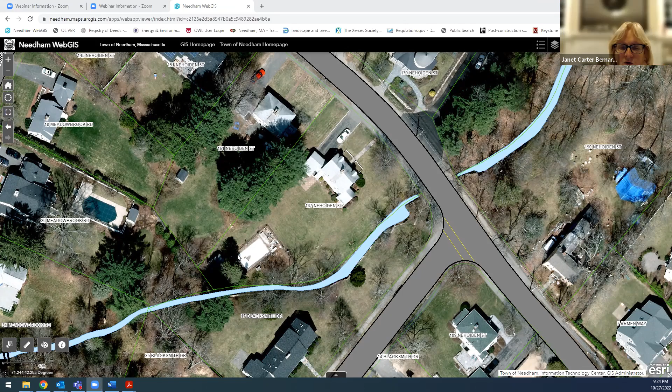Yeah, just as far as where the erosion control, where we want that. Yeah, I mean, I guess I would want it as far away from the river as they can put it, but I also think that they need to really, there's only 13 feet, so they can't get too far away.

On one edge, the 13-foot edge, but as they go up the side, if they can be further away, great. They don't need to put it right along the riverbank because they probably just want to define where the machinery is allowed to go and stuff. Yeah, but they can show us that on a simpler sketch. They don't have to have a full surveyed plan to do that.

Sue, you have anything to add? I'm fine.

Great, perfect. Now I've just realized that Steve is not here and I thought he was going to be here. Did he? He did say he was gonna be here. Yeah, he told me yesterday, sometime this week I talked to him. Oh, you did? I did, and he said he was gonna be here. Yeah, I forget when it was, this week though. Oh, well, anyway, all right, so we're done with that discussion?

Yes, I think so. All right, anything else? So we have the exhibits. Oh, and then one other thing, did you guys see the email I forwarded you from Kate?

At its meeting this week, the select board created an active recreation area working group. The board is asking that the Conservation Commission designate a member or other representative to work with the group. There was an attachment describing its purpose: it's an advisory capacity to guide the town in space planning for the future of active recreational opportunities in Needham.

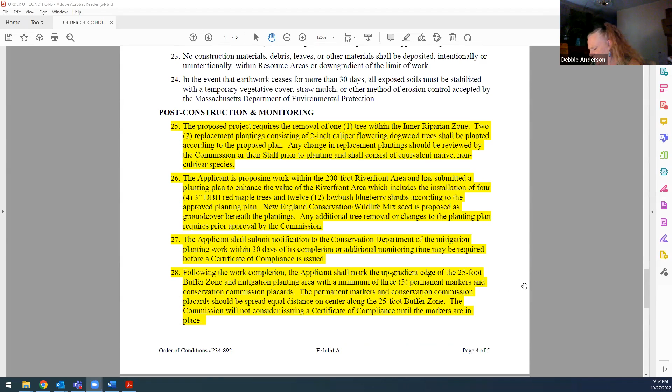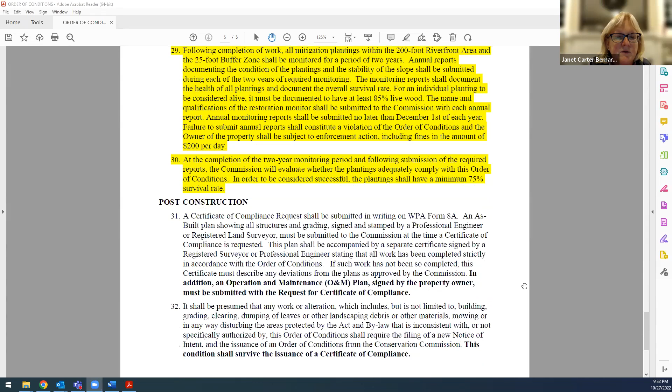That's right. Yeah, and then just the usual monitoring stuff. They need an O&M plan signed by the property owner. Do we say that the O&M plan needs to be signed by the property owner? Yes, signed by, yep, good. So I'll add all of those things in there. I'll add the waiver language.

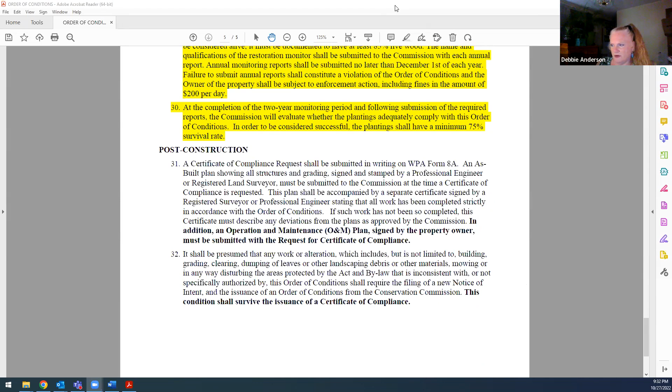I wish we could get these certificate of compliances faster. Well, we can say that we'll issue fines. We can word it that within a certain time period that they need to file. I think a lot of towns do that. They're supposed to. I think it even says it in the Wetlands Protection Act, that they have a certain number of days, but still. And there's all kinds of things towns have that the next owner needs to sign off, that they understand their property and the requirements. There's all kinds of things we can add to strengthen it.

Especially like the 2-year monitoring, we never get that. Not till people want to close it out and then all of a sudden this monitoring report shows up.

All right, so anyways, you can vote to issue. Well, you need to vote for the waiver, right? Waive the waiver. Okay, so we vote for the waiver first before we vote on anything else. So first, we need a motion to waive the work within the 25-foot no disturb zone for 311 Dedham Avenue, DEP file number 234-892.